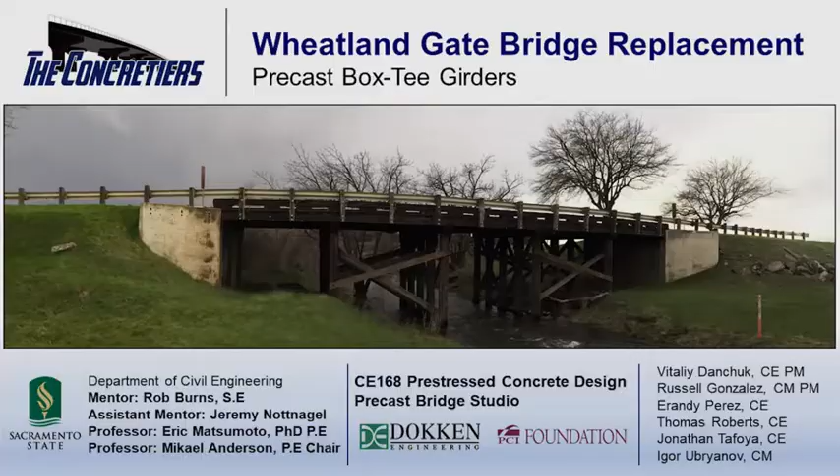Good afternoon, everyone. We are the Concreteers, and it's a pleasure for us to present before you this afternoon. We'd like to start off by acknowledging our team mentors, both Jeremy and Rob from Dokken Engineering, as well as Professor Matsumoto, who made this possible, and Professor Mikael Anderson as well. We'd like to speak to you about the Wheatland Gate Bridge Replacement Project.

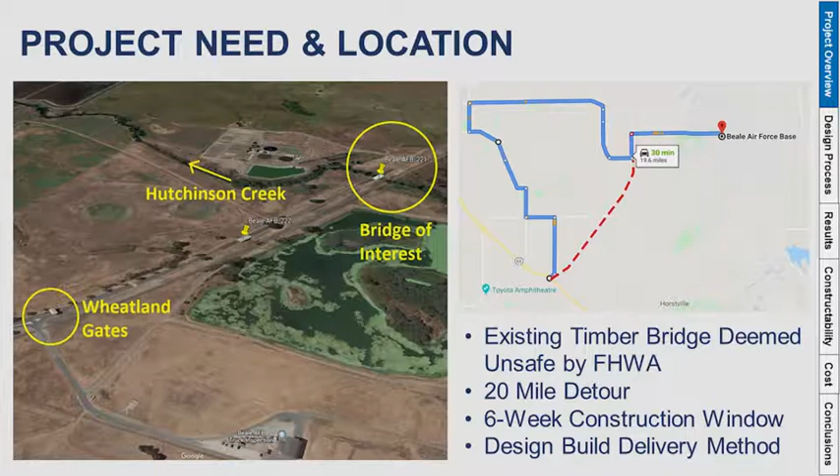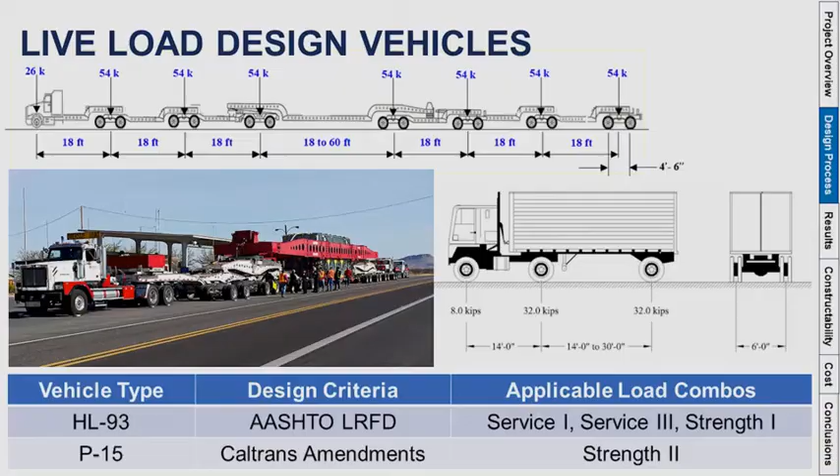This generated a 6-week construction window that is one of the biggest risks on this project. And by utilizing the design-build delivery method and selecting the precast girders, we were able to deliver in that 6-week construction window. So for our live load design vehicles, per AASHTO, we're supposed to design it to HL-93 at Service I, Service III, and Strength I. For Caltrans amendments, we had to design using the P-15 load. And this is a fictional truck that has an enormous amount of weight, which is represented in these figures above.

So our design progression began with finding the number of required pre-stressing strands, and that consisted of service 3 load combinations at the critical location, which is tension at midspan. So our initial design consisted of 32 strands and 4 temporary strands at the top.

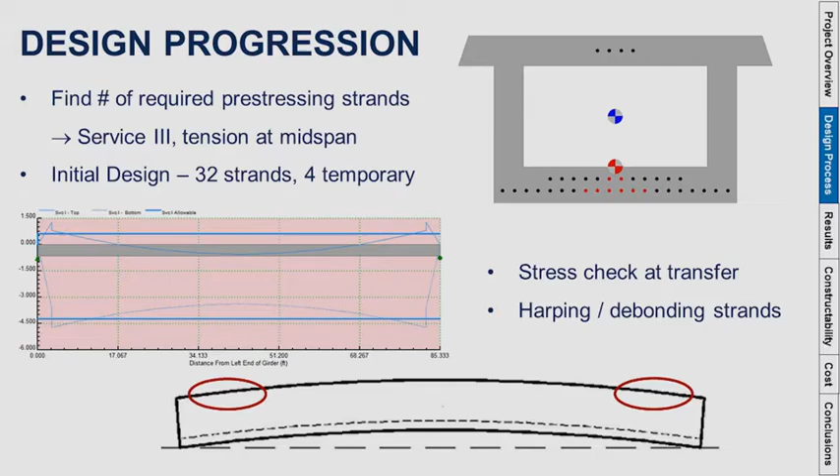However, when we did check our stress checks at transfer, we found that it would basically fail at the casting yard. And this is due to the camber that occurs, and the top is in tension, and you see the location circled in red. At that point, there's not enough dead load to counteract the tension at the top, and so you would expect cracking to happen at that point. So we had to consider either harping or debonding the strands.

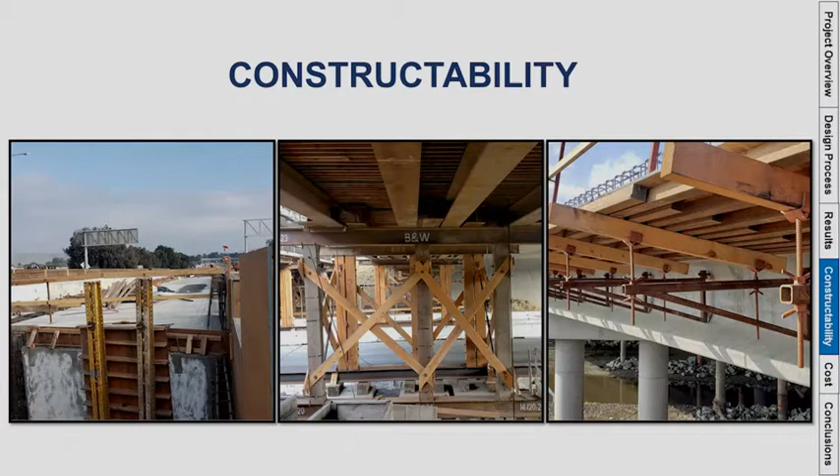So now that we talked about how we're going to design it and build it on paper, we're going to talk about how we're actually going to build this in the real world. So as construction managers, we have a lot of risk involved when we're doing this type of work, given there's a crane. We're erecting these very heavy girders, so there's a lot of pre-planning involved, but being able to work on a design build with the design team, we were actually able to work out a lot of the issues that we found in the pre-construction phase and get those addressed prior to construction.

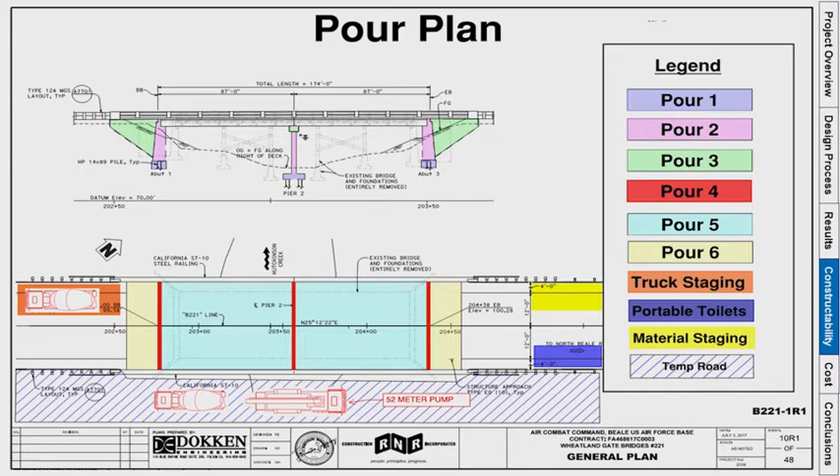Because we do have a very accelerated schedule, using the design build method and a precast girder really helped us accelerate that schedule. On the screen, you also see a pour plan or site logistics. This helps us plan our project well and also demonstrate to everyone and to you guys how we plan on building this project. All the different colors represent the different pours that we have in our substructure, because without the substructure, we could not erect our girders.

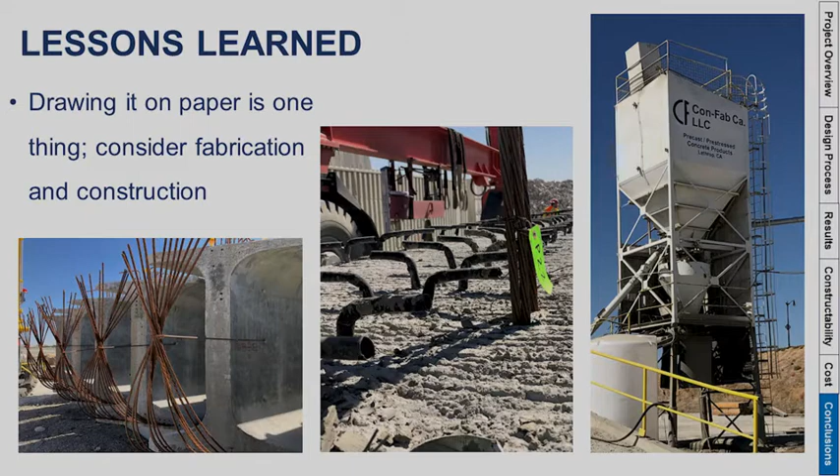There were definitely a lot of lessons learned throughout this entire project, and with working with the CM side, the one that stood out was definitely the difference between designing on paper versus fabricating and construction. Our CMs also learned that the CEs aren't that bad. CMs aren't that bad either. Going to Dokken and learning from Rob and his great diagrams he draws, and going to Con-Fab and seeing the concrete actually get produced, and wrapping it all up with seeing the bridge girders actually being erected. That was probably the biggest highlight for us.

And with all this great stuff, it was a big cost. There's a cost of time. There's cost of our sleepless nights, that guy over there, our headaches and anxiety, and the countless emails from Matsumoto at like 3 in the morning. But we also learned that the value of working as a team was absolutely priceless.

So if the new bridge lasted another 70 years, would that be considered a success? Yeah, you really can't put a price on safety of the public. Right. Okay. Great job. Thank you all very much.